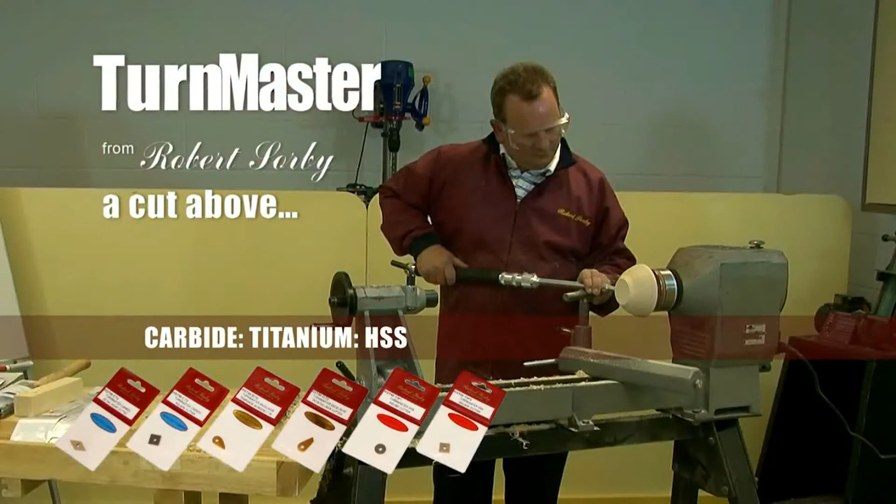What's that you got there? Looks really good. It's the new Robert Sorby TurnMaster. All right, can you tell me about it?

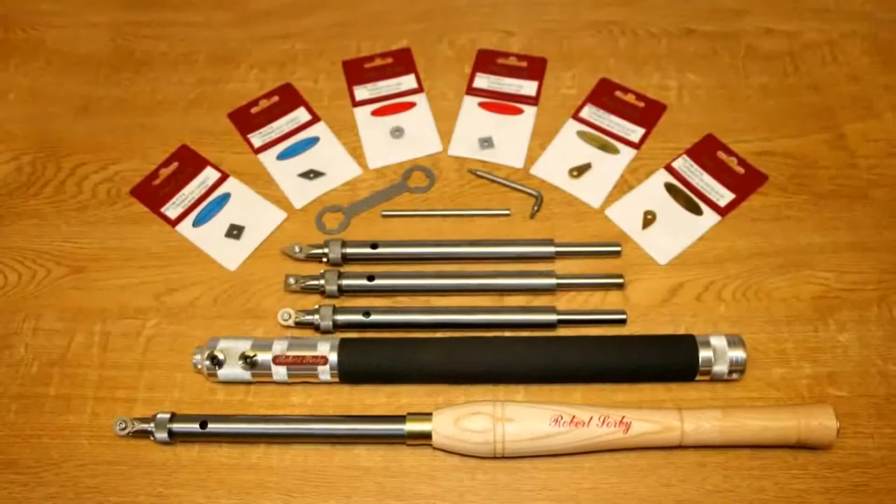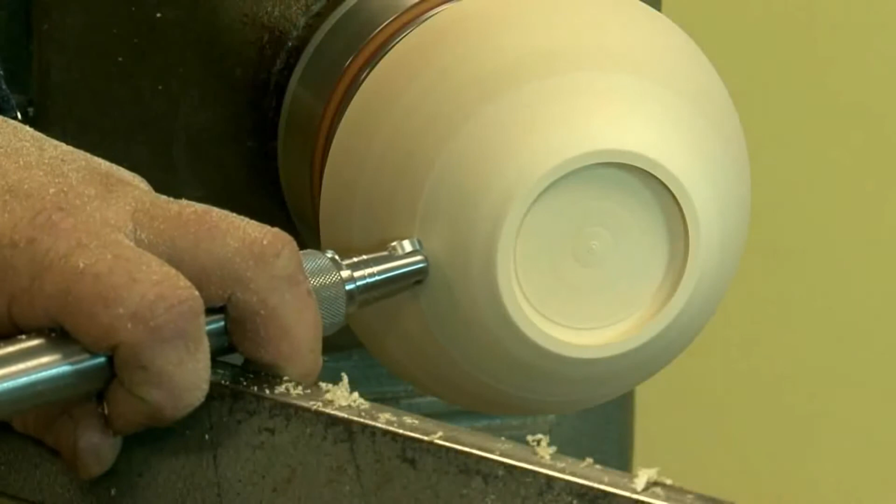Yeah, it's got several unique features, suitable for wood turners of all levels, including anyone that's never turned before. There are 3 options of cutters and a patented 3-position indexable working head, allowing for shear scraping as well as traditional scraping. The 3 materials are high-speed steel, titanium nitride coated high-speed steel, and tungsten carbide.

So why do you have 3 different types of steel? Good question. Tungsten carbide is the hardest of the 3 with excellent wear resistance. So that means I don't need to sharpen it very often? You don't need to sharpen it at all. It can be sharpened, but you do need specialist equipment to sharpen it on.

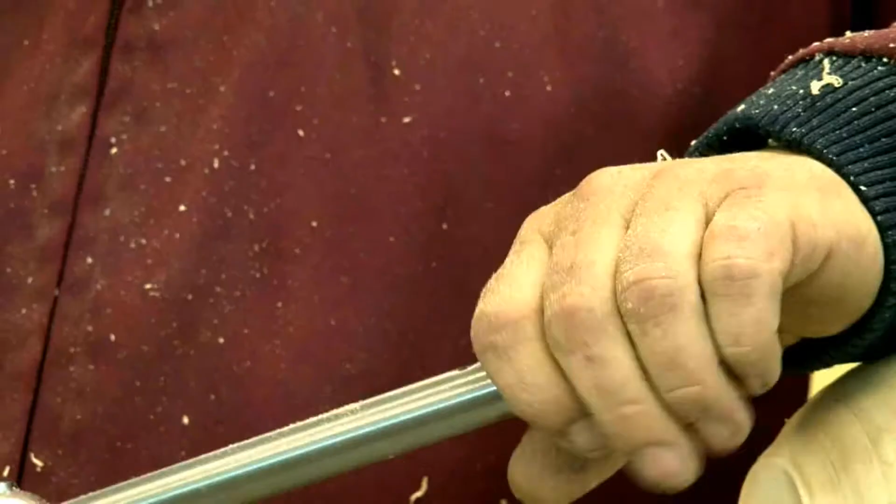Wow, it's amazing. Lasts forever then? Well, not quite forever, but you will get many turned items out of it before you have to replace the cutter. So when it's blunt, I just chuck it away and buy a new one? That's right, yeah. The tungsten carbide works so well.

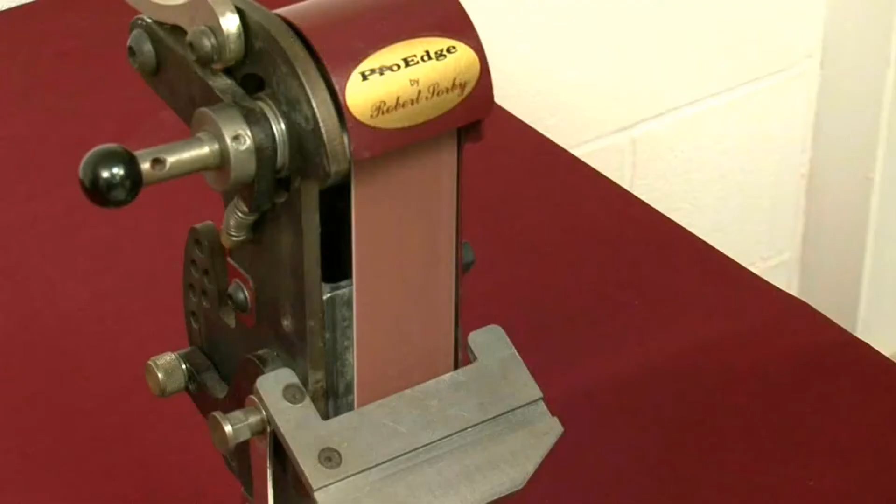Why do I need the other 2 choices of material? Another good question. High-speed steel has good wear resistance and it's easily sharpened on traditional grindstones, ProEdge sharpening machines and many others. High-speed steel will produce a much finer and sharper edge than tungsten carbide will, so you will get a much better finish from it. That's basically because high-speed steel has a finer grain structure than carbide.

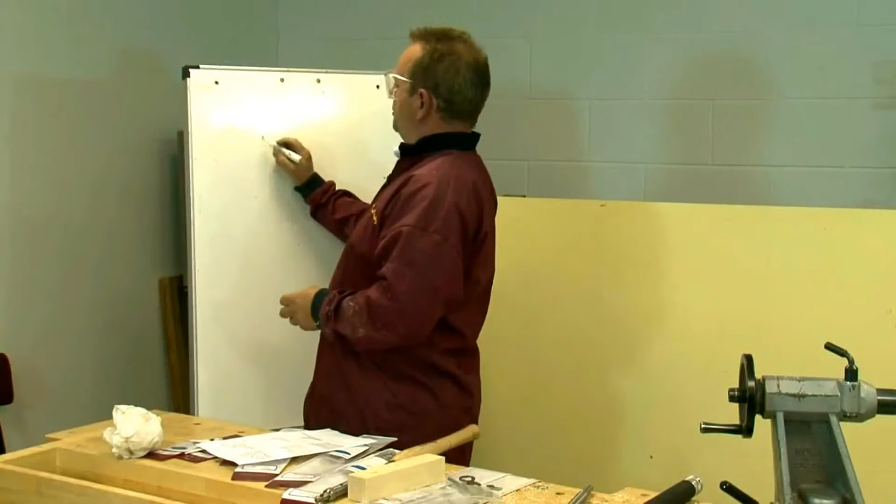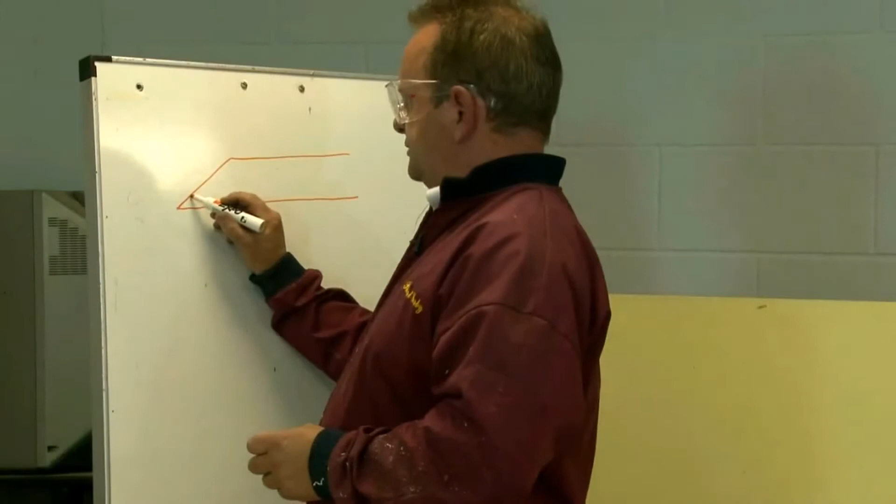I'll show you on a diagram. Any tool steel will only sharpen as sharp as the grain structure will allow. What do I mean by that? Tungsten carbide is actually not a solid metal at all. It's 50% tungsten, 50% carbon with a cobalt filler. So to look at the grain structure blown up thousands of times, the grain structure will look something like this.

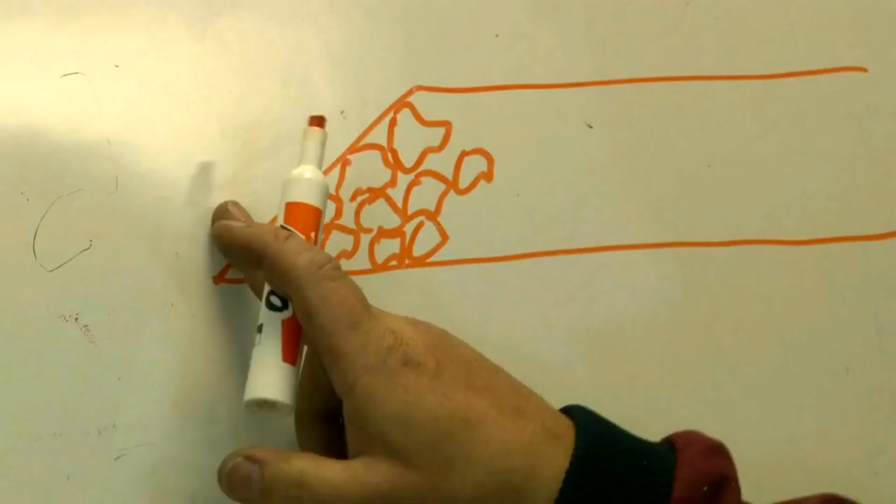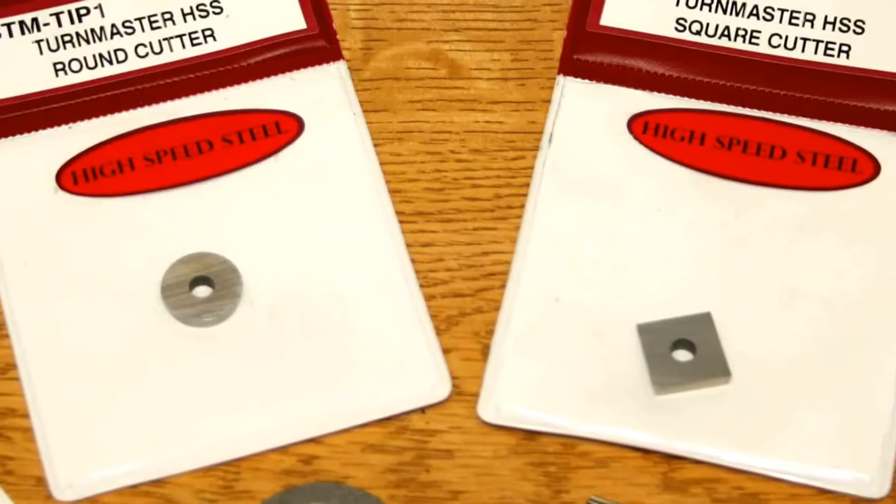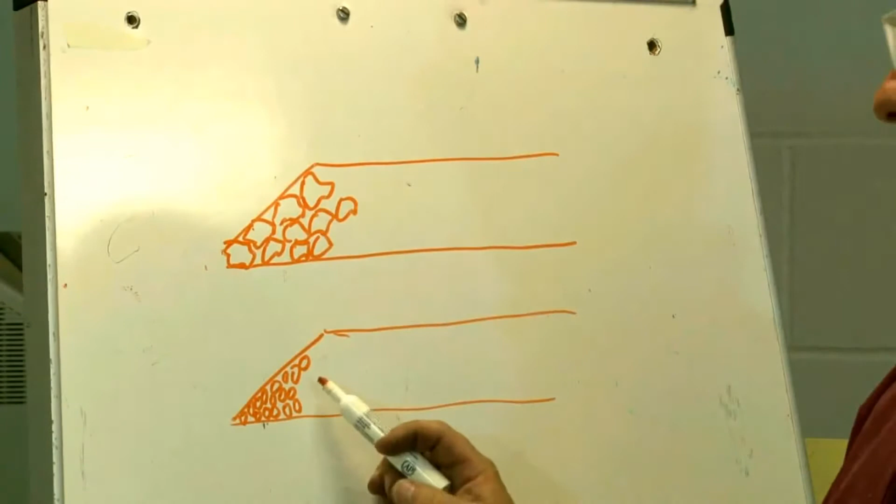Anything in between these crystals is filler and not actually a cutting material. So you'll see from that, the sharpest you'll ever get is limited by the size of the grain structure. If you imagine that as footballs, as an example, high-speed steel has a much finer structure. Compared to the carbide footballs, this would be more like a golf ball in size, and therefore the sharpest that you will ever get it is 4 times sharper than the carbide.

So what's the difference in sharpness when you're turning? A sharp edge will always be easier to turn. It'll produce a better finish on your turned item, and it's just a lot easier to use.

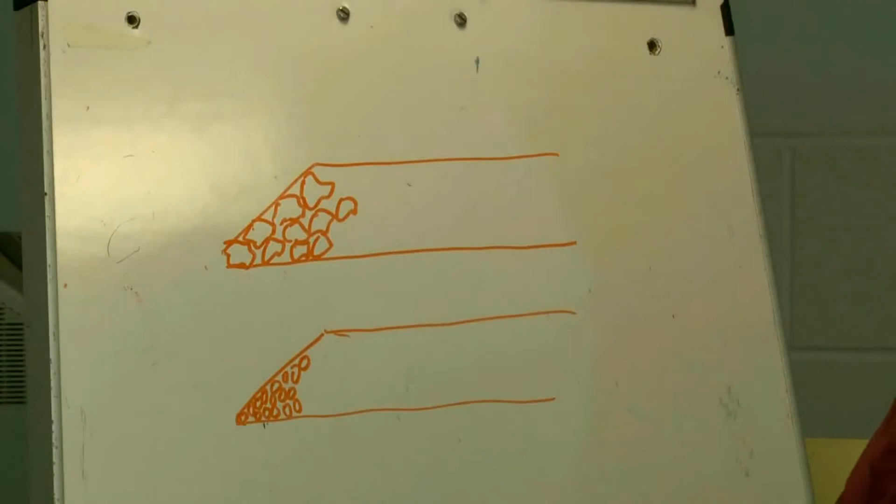So there's many plus points for both carbide and high speed? Absolutely, yeah. If you're machining exotic timbers, high silica content, very abrasive timbers, carbide is ideal and will outperform high-speed steel on roughing. If you're looking for a fine finish with clean detail, less sanding, then high-speed steel would be the choice. Well, they sound like 2 really good choices.

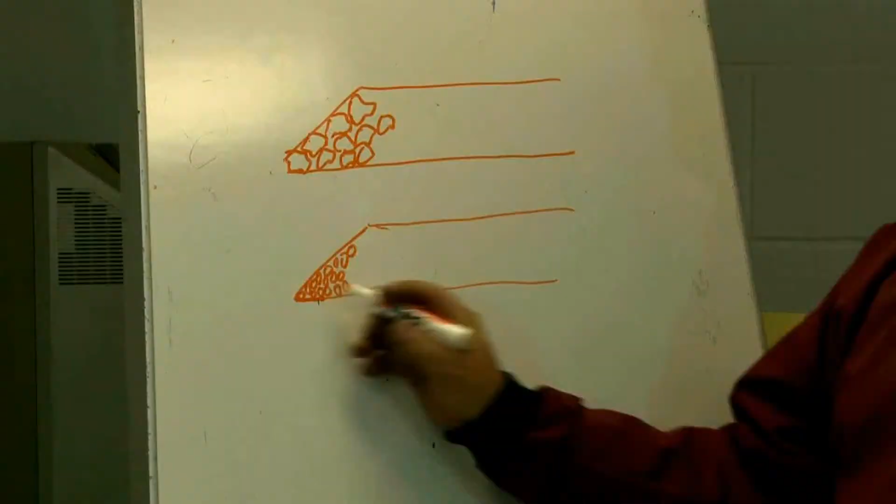But what about the titanium nitride? Yeah, the titanium nitride will basically enhance the high-speed steel. It puts a hard cutting face onto the high-speed steel, much harder than the high-speed steel, at about 90 Rockwell, and will extend the cutting life.

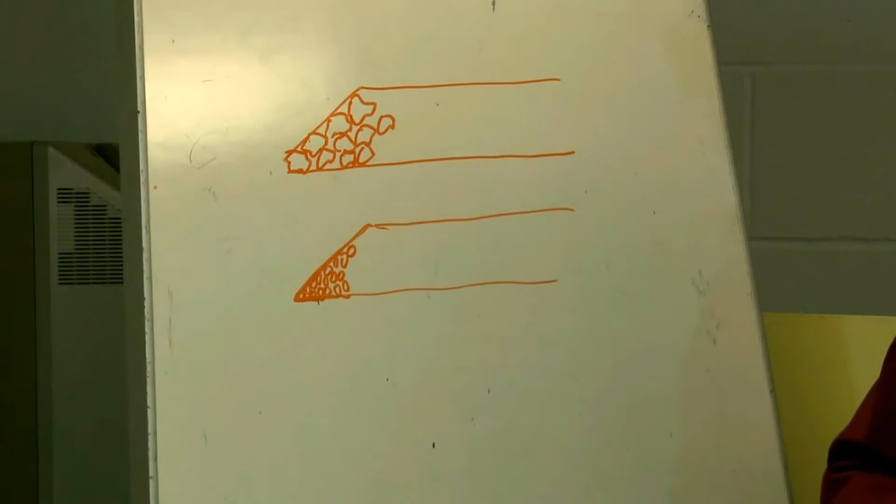So we'd still sharpen it the same way as normal high-speed steel? Absolutely, it can be sharpened on traditional equipment just the same as high-speed steel can. Surely when it's sharpened, the coating will just be removed and you'll be left with high-speed steel? No, not at all. I'll try and explain.

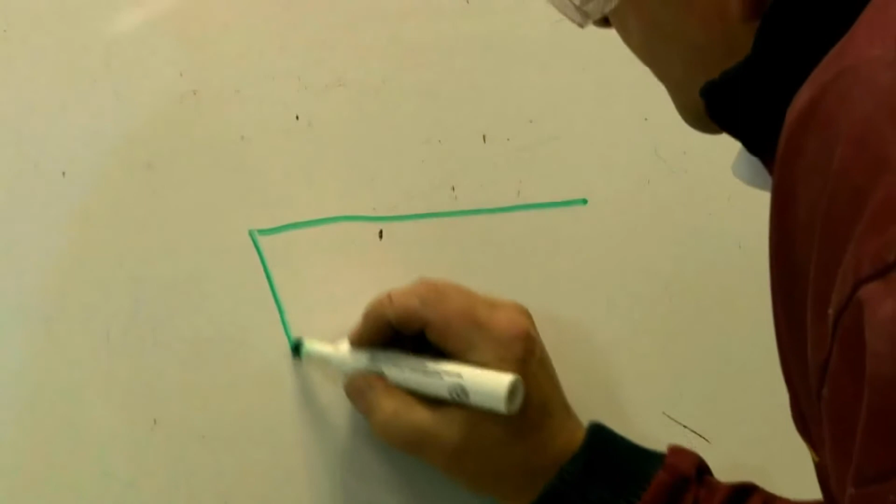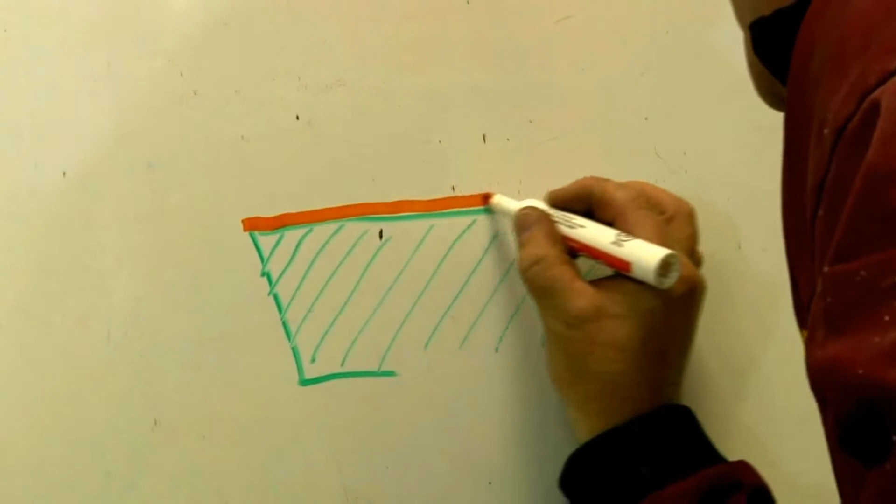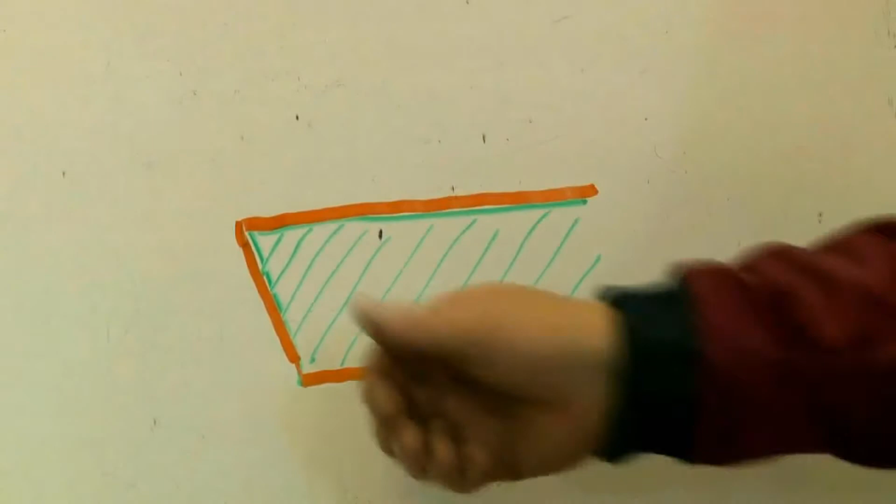If we take a traditional scraper, and then we add the plasma bonded titanium coat, it's the top face that is the cutting face. So no matter how many times you grind your cutting edge back, you will always be cutting with the titanium coated face. Oh, that's explained it a lot better, and I know what you mean.

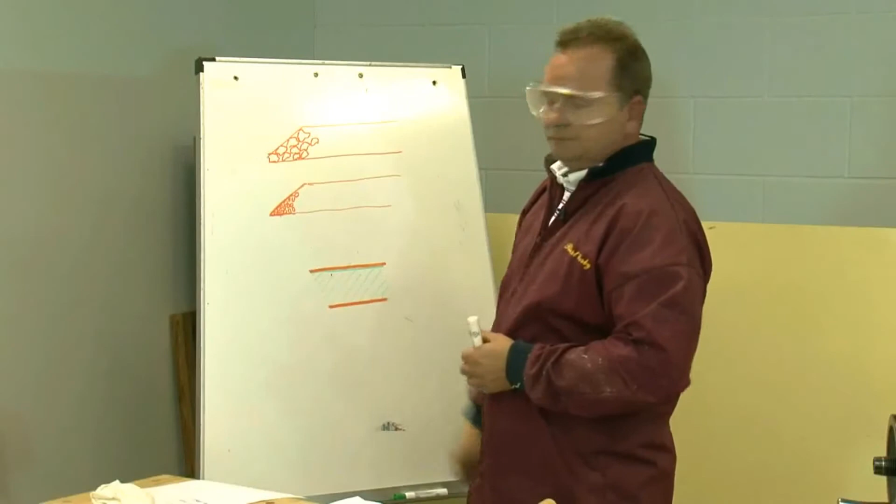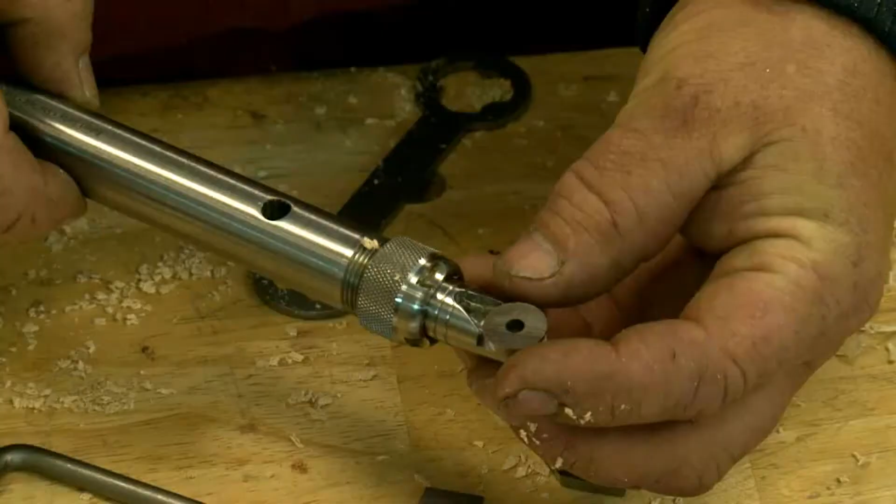So can you tell me a bit more about the head? Certainly. The unique cutting head is able to hold many different sizes and shapes of cutter. There are 7 high-speed steel tips available, 7 of the titanium nitride, and 3 of the tungsten carbide. All the cutters fit onto the unique head, held securely in place with the specific shape. These are all held in place with a high tensile Torx screw rather than a traditional Allen type screw.

The other plus point to the tool, you probably noticed that there's a flat on the back to keep the tool flat and level. This keeps the cutter, head and the tool in the same plane. To enable us to shear scrape, the head has 3 indexable positions, one to the left as well as one to the right. What's shear scraping?

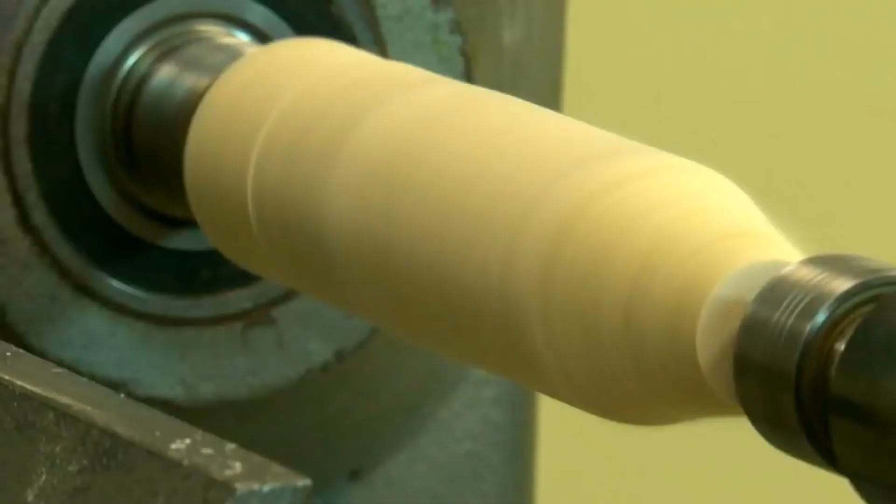Shear scraping gives you a much better finish and allows you to shear through the fibres of the timber rather than chopping out the fibres. We'll go to the lathe and I can show that.

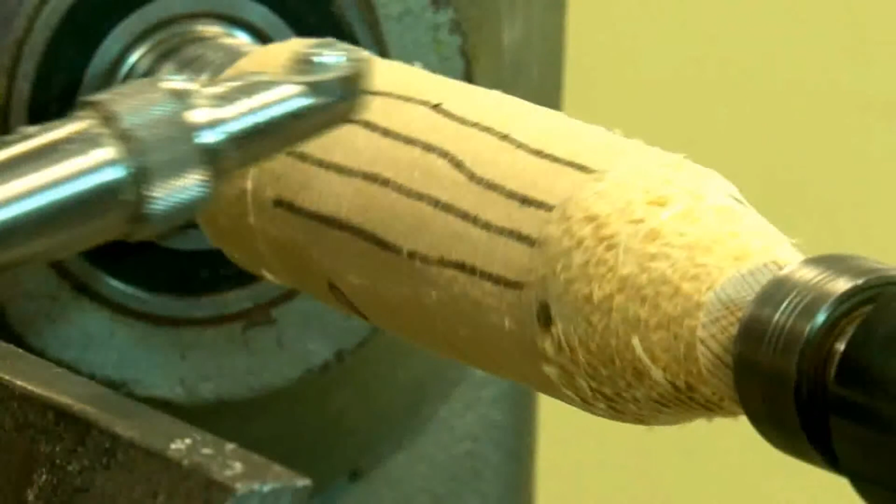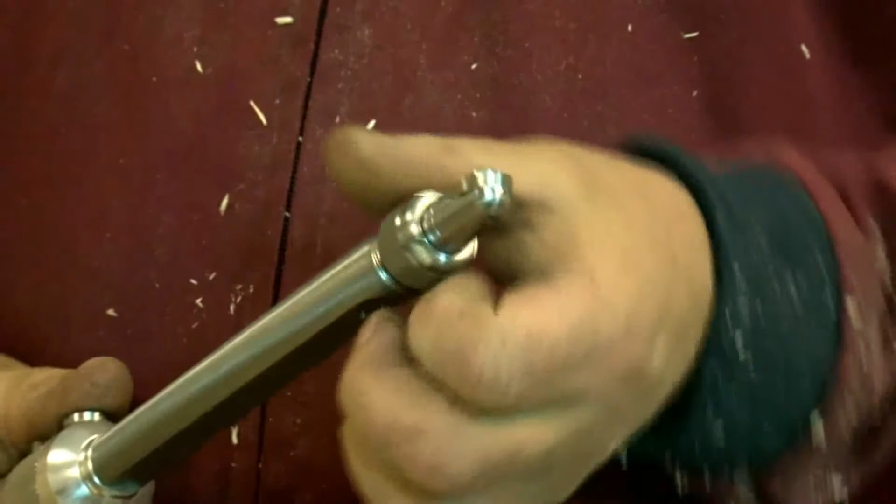We'll see from that although it's removed the material very quickly, the finish is not good at all. So if we put the tool into shear scraping mode, slacken the head, index it to the right, retighten the head, and now the same cut but shear scraping.

The cutter is now shearing through the fibres of the grain. The difference should speak for itself. Our finish is wonderful.

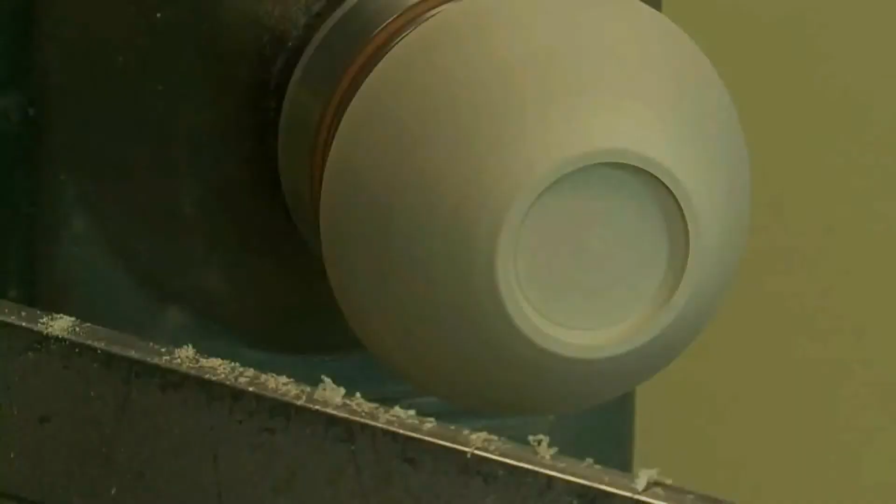So again, in traditional scraping mode, in order to remove material, and in shear scraping mode, in order to slice through the grain to give that very important finish.

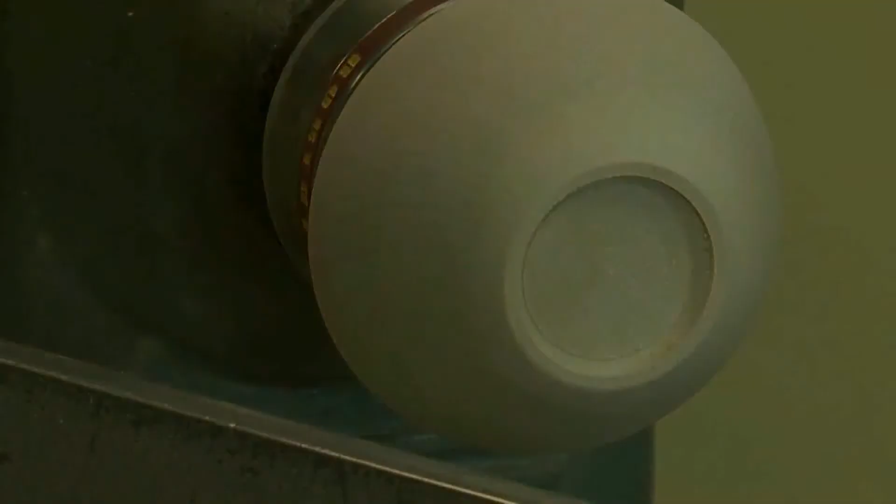Again, in traditional scraping mode, material can be removed very rapidly. Although that leaves a reasonable finish, this can be vastly improved by switching to shear scraping mode.

So with the head angled to the right, shearing through the fibres of the timber. Again, the all-important finishing cut will give you an almost perfect finish. That's an amazing finish.

And that's the Robert Sorby TurnMaster.